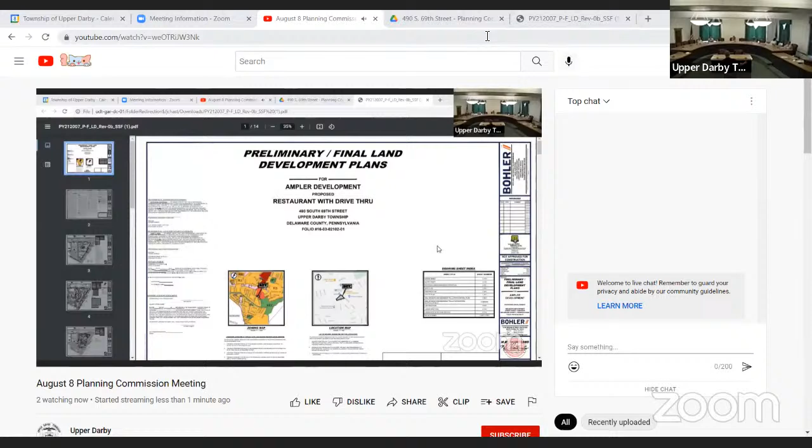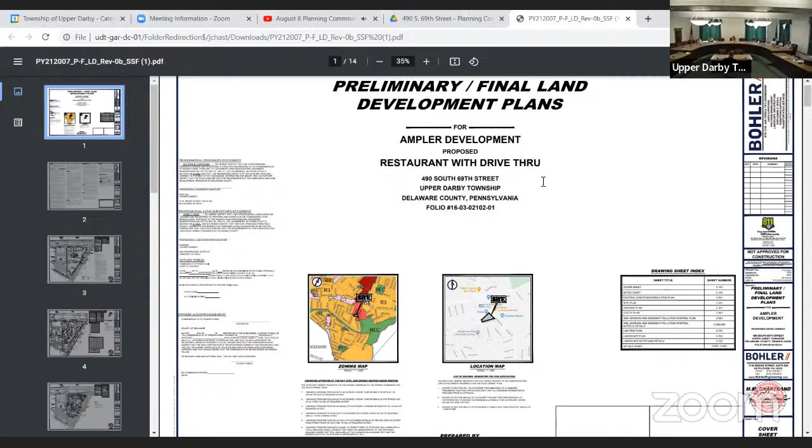And this is actually one of the first that we're doing with them for a new ground-up store. Everything else, like I said, had been rehabbing their existing facilities. They continue to do that. But this was a location that they came across through brokers that they were interested in and wanted to take a go at. We have gone through the zoning hearing board to get some relief that we needed for the development, and that was granted probably 2 or 3 months ago. Then we subsequently filed the land development. This is obviously our first time here before you guys this evening.

Appreciate your time. Appreciate everyone coming out. I know the summer's difficult to get everyone together, get a quorum, so I do appreciate it. But up there on the board is a copy of our land development plans. We've got a full set, running from our existing conditions and landscape plans, lighting plans, grading plans, so on and so forth. If you could just pull up the site plan itself, I can talk through that.

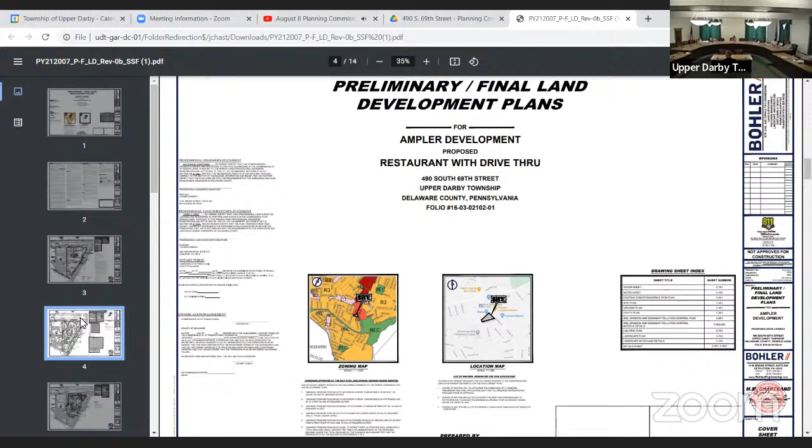So location, is everyone familiar with this location? Okay. What's the corner street? It's Patterson Avenue, 69th and Patterson. Okay, what's there now, Josh? The Pearl Vision building? Okay. Yeah, it's been vacant for I don't know how long. It's not in great condition, I know that much. Yep. It's next to the Wawa. Okay, I know where it is, I'm just trying to get my bearings. Across from the Popeyes, next to the Wawa. Pearl Vision. The chain, yes.

I thought you said prohibition. I heard the same the first time.

But yeah, so former Pearl Vision location, like I said, the building has been vacant and somewhat of disrepair. I would hope that the township is anxious to get someone in there that's going to take care of that lot and breathe some new life into that corner. So yeah, immediately adjacent to Plan West, I'm just going to refer to that as West, is the Wawa, existing Wawa building that's there right now.

The lot itself is largely paved. There's really only one area towards kind of the very back corner where it narrows down. It's a triangularly shaped lot, which leads to a lot of the difficulties in our layout in trying to make this work. Yeah, so you can see there where there's some existing tree line along the back and green space there, which we're really trying to maintain as much as possible. That's our closest neighbors, if you will, from a residential standpoint. So we're trying to maintain that and keep everything up towards the front.

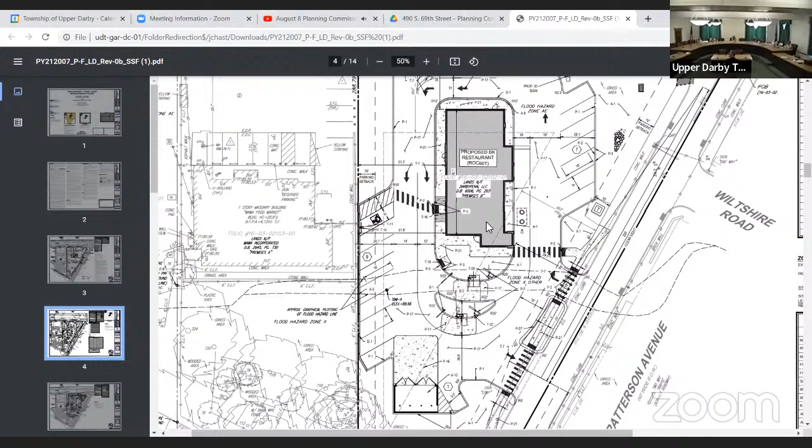I'm sure my red pointer won't work on the screen. No, it never does. Someone told me that green, if you can get a green laser pointer, that green will work on the television. So I gotta get a new one here.

But we are adding some green space out towards the corner there. And there will be kind of a small stormwater management area and, like I said, some green space. We're gonna have a small rain garden just to be able to address the stormwater before it leaves the site. We also know that this area is prone to flooding and is a significant concern. So part of what we had to do in order to make this development work was raise the building fairly considerably from where the existing Pearl Vision is today, several feet higher.

That's led to some grading challenges as it relates to the driveways and the area around it. Obviously, once we get to the parking areas and crosswalks, we have to meet ADA requirements. So there, we're all within the standards that are required. But some of the relief that we are asking for as it relates to waivers do come down to the narrowness of the lot, the elevation that we're dealing with in trying to get this done, and just trying to kind of fit it all in as best we can.

And again, the variances that we were asking for were very similar, and I think that board understood that to redevelop a site like this with the challenges in front of us, it was going to take some relief in order to be able to get there. So, functionally, we have one driveway on 69th Street. There's actually two driveways out there right now on 69th Street, one that's closer to the intersection that we're going to be closing, and then we're going to keep the one driveway where we have it shown here, which basically aligns with where the current driveway is today.

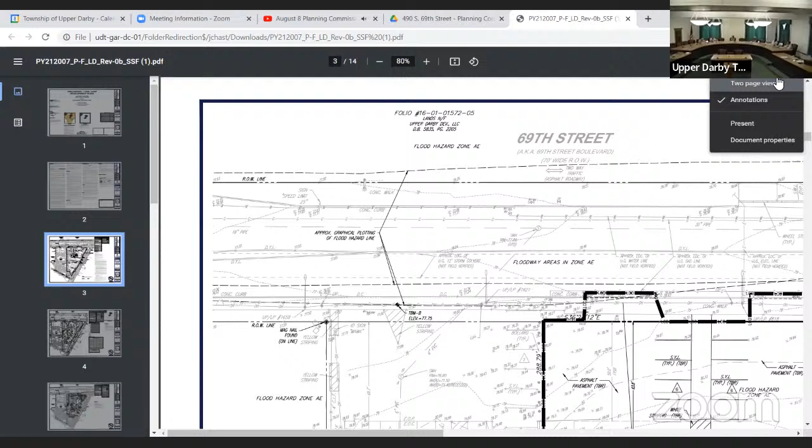I'm sorry, excuse me. Is there any chance that we could do a full screen and make this a little bit more, for those of us who are? Zoom in a little more. Can you make it full screen? Does the mic that's near the screen work? Yeah. You want me to go over there and point from over there? Sure. I'll go wherever you want. It's not closed? Can you guys hear me okay? I can just speak loud if the microphone, okay.

All right. So this is the existing conditions plan that's in our plan set here. So you can see now, this is the former building that was talked about, the Pearl Vision.

Two driveways where we have that line kind of shown. That's sort of the limit of the area that we are disturbing and the area that we're touching. So we've got the one driveway here, which is going to close, and then we've got the one driveway here, which is going to remain open and be reconfigured slightly. Is that better? That's the 69th Street side. Correct. That's the 69th Street side.

One question before you go on: is 69th Street a township road or is it a state road? Yeah, 69th Street is. So PennDOT does have to approve all the driveways? Correct, yes. So we've had some preliminary discussion with PennDOT. Traffic Planning and Design is our traffic engineering firm that's working with us on this, so they're handling the highway occupancy permit application.

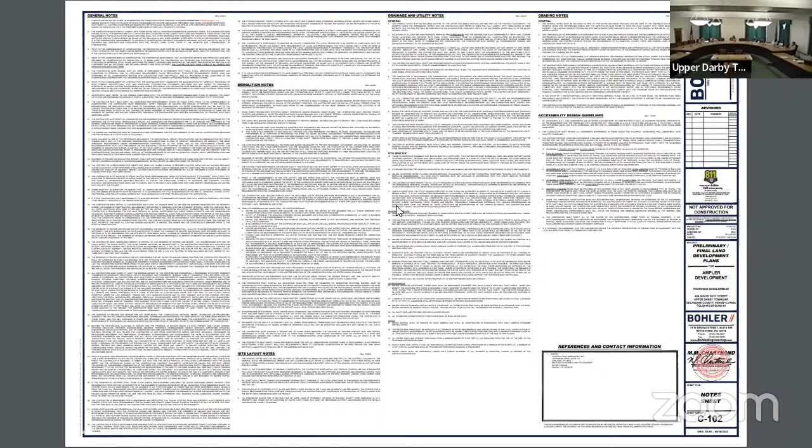And they've had some preliminary discussion. They showed our initial plan to them, what we were proposing to do, and the feedback that we got was that they were on board with it. So not to say that there won't be some changes along the way and that they might ask for other types of improvements. But as of right now, they felt strongly about closing the driveway closer to the intersection from a safety perspective and locating the other one where we have it.

So again, parking, you can see right now there's striped parking that's there. If you look at an old aerial of the site, you can see that they parked even along this side, right up against the Wawa, even though that maybe technically wasn't striped for parking. But the macadam and paved areas really come all the way back into this corner of the site, and pretty much everything besides this little bit at the corner is asphalt today. So we're trying to do what we can to beautify the site a little bit, add a little bit more green space where we can, and functionally make it a lot better of a layout.

The tree line or bush line or green space, that's going to butt up against the residential? Yeah, so the area back here to plan south, which is probably technically west, north is pointing this way. So to our west here is a residential area. The trees that you see there now, we're proposing to maintain those trees and then add some more green space to that area at the back. If you want to go straight to the landscape plan, I can talk through that. And there's no greenage in the front?

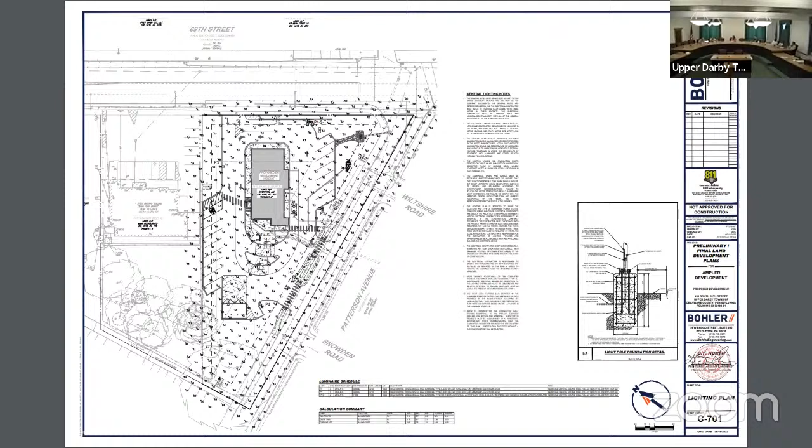There was a little bit, but there will be even more. It's going to be a rain garden, but it'll be planted. So the rain garden's going to have trees around it, and shrubbery and bushes within it. It's all basically to try to take up whatever water we can that drains down to that portion. So we've got our trash enclosure at the back of the site.

Functionally, it's where it makes the most sense for it to be, so the trash truck can come in off of 69th, come straight forward, make their pickup, and then come directly out the side, back out to Patterson Avenue. We are proposing to add some more trees in there, a row of shrubbery around to try to screen the enclosure so that it will be minimizing that impact.

And then around the building, this is the drive-through area. We do have a double lane to our drive-through. So you'll be able to pull in, start in a single lane, split to two order points, and then they come back together to pick up along the eastern side of the building and then exit back out of the site. So again, adding some trees along the western or northern portion of our site adjacent to Wawa.

One of the things that we did talk about with your engineer was trying to add some pedestrian connectivity out to 69th Street. The challenge is the grade. But we have said that we'll do what we can to make that work. Our thought is that we could bring some form of sidewalk up through here. It may require some stairs. So from an ADA accessibility standpoint, the ADA path that we have is really coming off of Patterson Avenue here, where we have a slight jog in the sidewalk, a crosswalk getting to the back of the building, and then around to the main door.

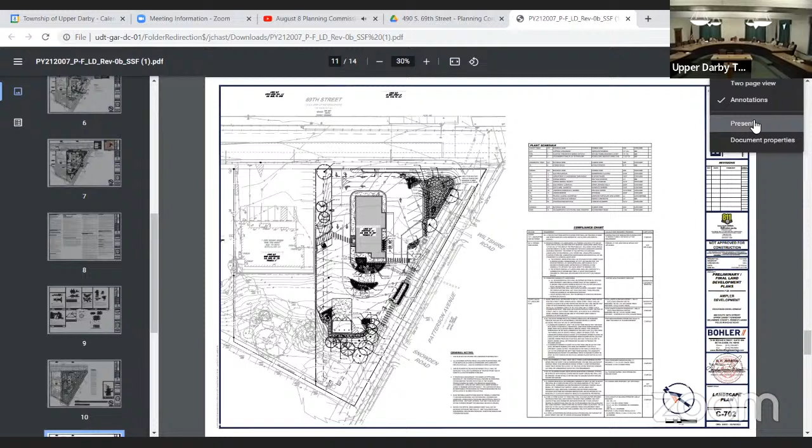Typically what they have is a pickup window and a pay window. So again, all about trying to move you through a little bit faster. You pay here, you pick up here, and then you keep going. If you look at the capacity from this point all the way back, I think we were like over 12 vehicles that can stack within that space.

Can you show me where the bike rack is? Yeah, so that was one of the things that we talked about. As of right now, on this plan, we're not showing a bike rack. My thought is that where we have this crosswalk here coming from this side, we could put a bike rack directly adjacent to that.

Again, potentially, if you felt that it was more appropriate or you'd rather have it out more towards the 69th Street side, where we extend the sidewalk along here, we could find a place for it. There's definitely a place for it. We just didn't have it located on our initial plan.

Are there bike lanes on Patterson? I doubt it. Okay. But there are on 69th Street? Yes, no? I don't know if there are in that location. This location. Might be across the street, I think, maybe. I don't know. It's definitely in the planning.

We're always looking to put new bike lanes in whenever we repave the road. Mhm. We're always adding new bike lanes. We're working with PennDOT to do so. So, yeah, we're happy to add that wherever it makes sense, and we'll work through the details of that with your engineer. What's the total square footage of green space with the rain garden and the back greenage?

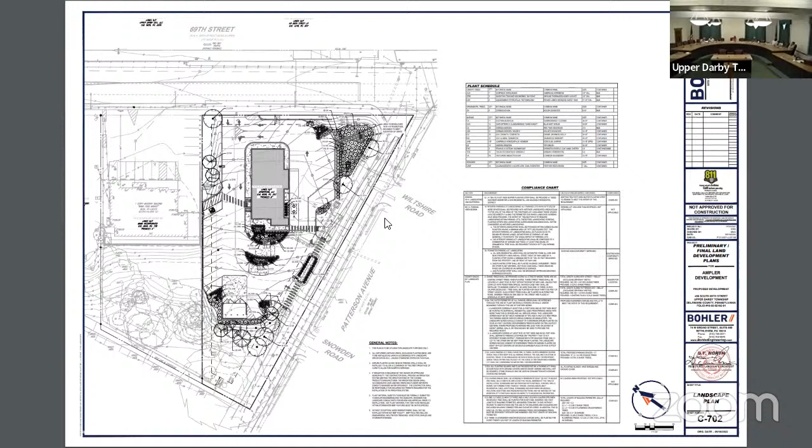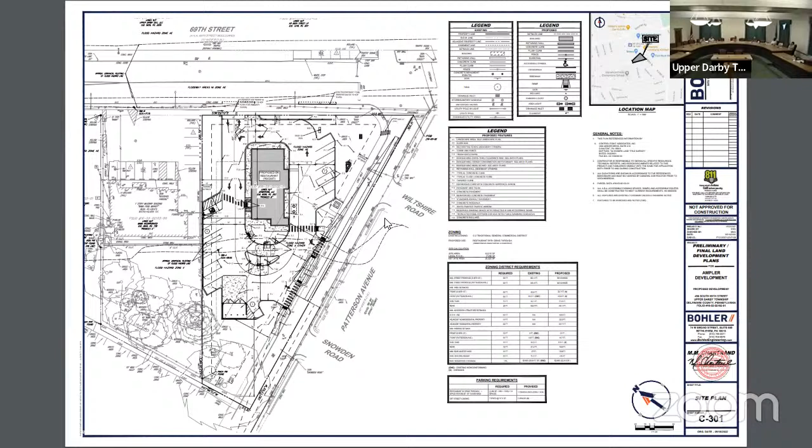Could you go back to the site plan? It should be, I make up my own terms for greenage. I don't know if it's an acceptable term. Probably never ever heard of it. Next one here, okay. Any chance you can zoom in a little bit more on the district requirements? I think I can read it, but. Down in this area. There we go, okay.

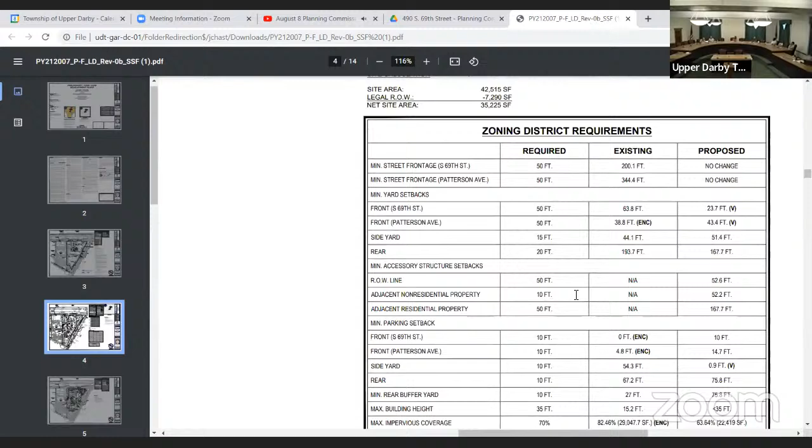So impervious coverage on the site, allowable is 70%. That's paved surface, not green space. So think of the flip when we're talking about this, right? 30% green space, 70% impervious. Existing is roughly 82.5%. So you're reducing that? We're bringing that down to just under 64% impervious. So we're increasing the amount of green space here.

And for a site of this nature, you know, it looks like it's around 6,500 square feet of green space that we're adding, which is pretty substantial. So that was one that we were able to bring into compliance with this plan, which again, I think the zoning hearing board was happy to see as well.

And no outdoor seating, right? Correct. Okay. And what'd you say? No outdoor dining. Yeah, we don't have room for it. They do that at a few of their locations, but not many. It's not primary for Burger King. So if I'm doing the numbers, about 35% of the space will have greenage? Is that about what you said? Yeah. Yep. Okay, thank you.

Well, that's nice. Yeah, so even looking through some of these other ones, some of them, where we're adding some parking or some other things, we needed variances from side yard setback where we had the parking along that west side a little closer, but when you look at the rear buffer yard, right? Minimum required buffer yard, 10 feet, existing 27, we're at 75.8. So that's that area that you're talking about adjacent to the residential. That's an area that we're expanding fairly significantly beyond where the encroachment is towards it today.

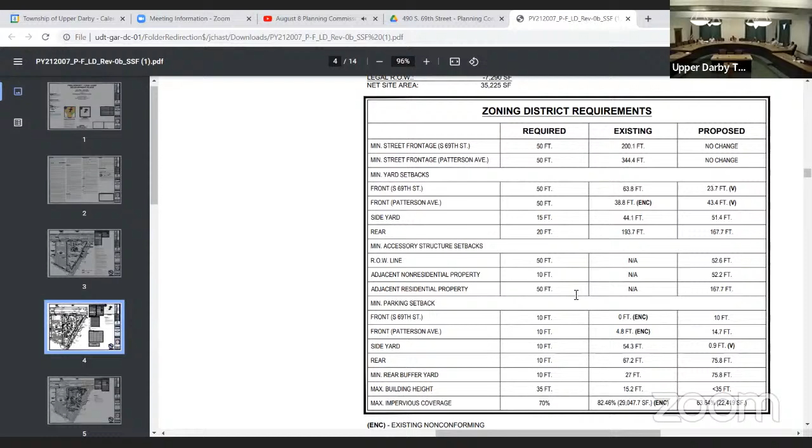I'm sorry, just one more time, can you show me the ADA access? Sure. And, Mike, zoom back out? Mike, I have a question. Yes. So at some point, as things change, like in Philadelphia, where more people are biking and busing and walking, they reduce the parking. I mean, like the 17 parking spaces, if half the business is drive-through, maybe they need less parking.

I think the way they laid out the site, they were trying to minimize the amount of variances that would be required. If they reduced the number of parking spaces on the site, they would essentially now need another variance. With the amount of parking on the site, you gotta remember, there's gonna be employees there, you could have up to 6 spaces for employees. Right. You have 50, 60 seats inside the building, you're ultimately gonna have people driving to the site. Okay, 56, I forgot what the inside was.

Yeah, I'm just wondering, at some point, I think in Upper Darby, certain areas are gonna need less parking than they did 50 years ago. Well, we do. Yeah, and I think Josh could probably talk a little more about it, but we do have a 20% transit credit in certain sections of the ordinance, depending on what zone you're in. I don't know if this is in that zone, but Josh is pretty familiar with that.

But, for instance, we have one space here, which I typically wouldn't even locate as one single space on its own, but to achieve the zoning that we needed, we added it in there. But the reality is that's going to be a parking space for the manager, who's going to park back here. And as was stated, maybe a few of these that are further back from the doors are where your employees park, to maximize the areas closest to the doors for patrons.

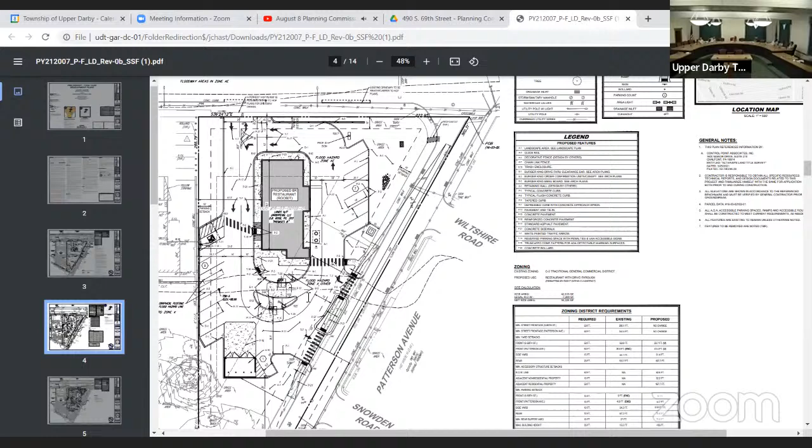Where's my right-of-way line? So we're showing actually, I think, a half-width right-of-way. It's tough. It's right here. So you can see that part of the sidewalk jogs back a little bit here where we have that island, and then it comes back down in, so there is some width still there from the right-of-way to the road, and that exists on both sides. We just can't give more at this point in time. So that was a waiver that we were asking for.

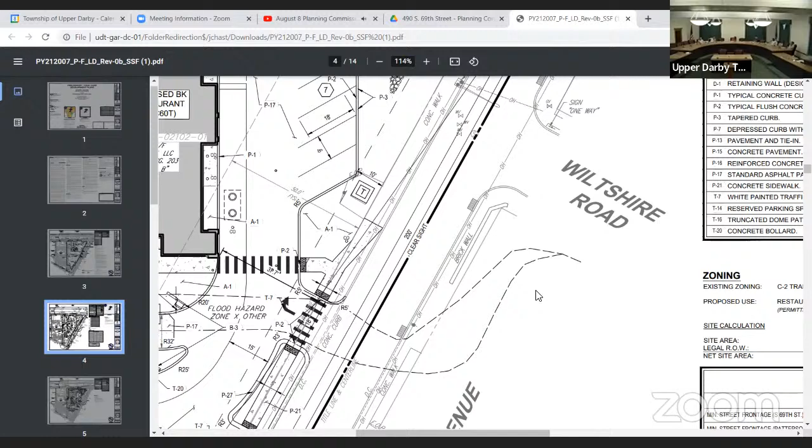The third waiver, do you want me to list the actual sections? Would that be helpful? No, just read through the waiver letter, and then I think that should be fine. Okay. So, just because I'm sure this is being recorded, the first one for the preliminary final was SALDO Section 300-1. The second one for the right-of-way was Section 803.B.1. The third one that we're asking for is from 805.A.3, and that's for the maximum grade of a driveway.

The maximum grade by the ordinance is 4%. And we're just not able to achieve that here. So what we did talk about was, if you were right about to leave the site where you're parked waiting to make a turn, trying to keep that as close as possible to 4%. And actually PennDOT requirements are going to put us in that range, somewhere between 4 and maybe 6 at the most. Typically what PennDOT's looking for is a grade change of less than 8%.

So if you think of most roadways, they're supposed to have what they call a crown, but it's supposed to be 2% graded away from either side, and they don't want it going up more than 6% because then you're potentially bottoming out your car as you make that entrance or you make that exit. So 6% is the maximum that they typically allow there. We've got sidewalk to contend with, we've got pedestrians to contend with.

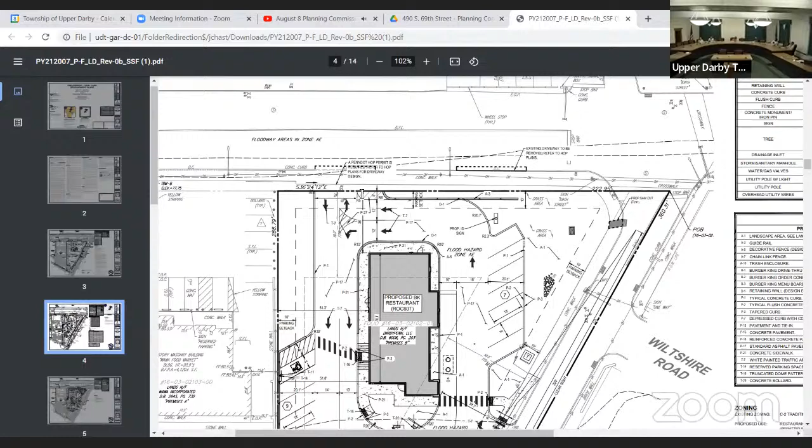It matches the existing location that's out there, but it's closer than 100 feet to the Wawa's driveway today. That is not changing. And there was, I think, another portion of that. There's another section which is in the same vein. Actually, I'll touch base on that one now, then I'll jump back to the one that we also needed to add. So the other was from Section 805.C.3.

So 805.C.2 is the one I just talked about, and then 805.C.3 talks about the separation distance of non-residential driveways on opposite sides of the street. If you look at where this driveway is, there's another driveway to the shopping center that's almost at the intersection. It's kind of creating a fourth leg to that intersection, and it's 140 feet from the center line of their driveway to the center line of ours. But 10 feet further for us makes all this alignment just off from where we need it to be. So we're at 140 instead of the 150 required by the code. So that was the other portion related to it.

Okay, so going back to the one that I missed putting in the letter. If you have a copy of the letter, this one was not in there. But it's 806.C.7, which again, we did talk about with your engineer. And that was to allow a radius of curvature on curb that's less than 5 feet. So typically you have a 5-foot minimum radius, and that's so that a car can swing into a parking space or whatever. The only areas that we have that, there's a few.

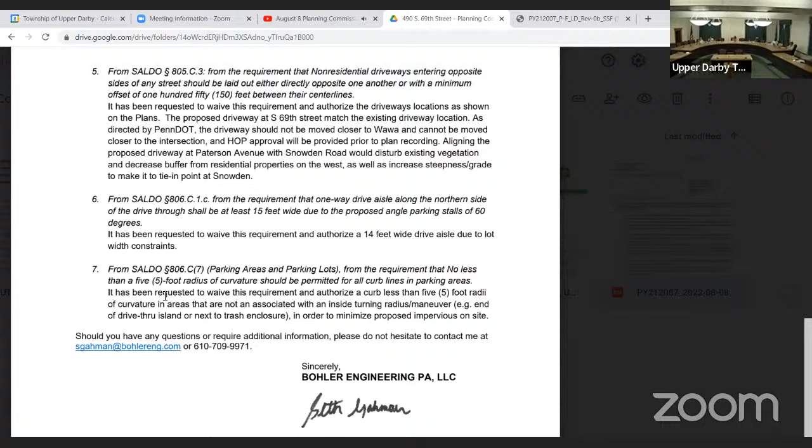This one I actually made mention of earlier. This is 806.C.1.C. And this was to allow less than a 15-foot wide drive aisle adjacent to the building. And that's only on the one side. It's on that northern side of the building where we had 14 feet. It was here, at this point here. So we've got a 10-foot wide lane for the drive-through, which is typical.

And typically, people will even hug a little bit closer to the curb line there. So the reality is that there's going to be a little bit more room than the 14 feet that you're going to see. But for purposes of design, we have 14 feet there. We have an angle parking space, so nobody will have the idea of trying to back out this way and try to go against traffic to get back out. So again, we think that's a safe movement there to be able to accommodate that.

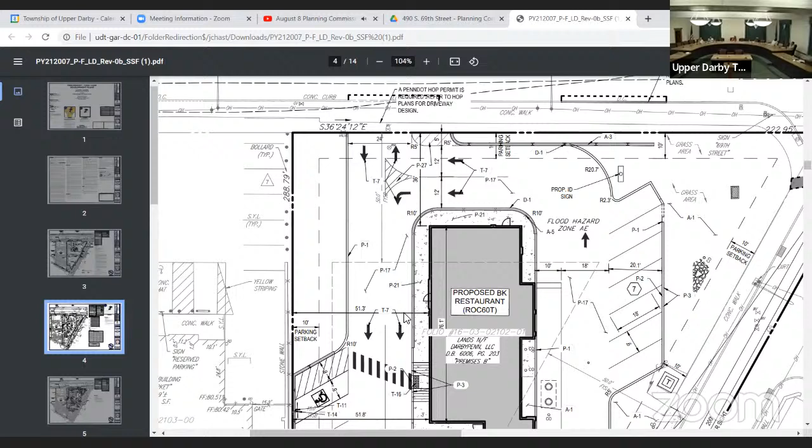All right, last one. Oh, I apologize. It was on there. So back to the other one that I said was not, which was 806C7, that is on there as item 7. So those are the waivers that we were asking for. Again, I hope with the explanation that I gave that you would give consideration to those. Everything else that's within the letter from Mike's office was either engineering items for us to address, some things for us to look at, some outside permits that we know that we need to get. We know that we need to deal with utilities and PennDOT and all of those things along the way.

So we still have some steps ahead of us, but. Has the sign already been approved, and how high is it? We did go through signage with the zoning hearing board. Well, is it within the, you didn't need relief for the sign, did you? Relative to the freestanding sign, I don't believe so. I think the only relief that we needed, from my recollection, and I apologize if I'm wrong, but again, we did go before the zoning board on it.

I think it was the number of signs on the building. And it wasn't that they were substantially larger. When we looked at the sides of the building that we were allowed to put it on, which was like one sign on Paterson and one sign on 69th Street, we had like 2 on Paterson, but when you look at the size, it was actually smaller than what we were allowed by 1.

And we had 1 on 69th, and then I think there was 1 over the doors that actually faces towards the Wawa, which was not technically allowed because it wasn't facing a street. So it was the number of signs, but when you looked at the overall area, it was less than what we would have been allowed if we just had one singular sign there. So how many signs are there? I didn't follow that, I'm sorry. I think there's 4 on the building.